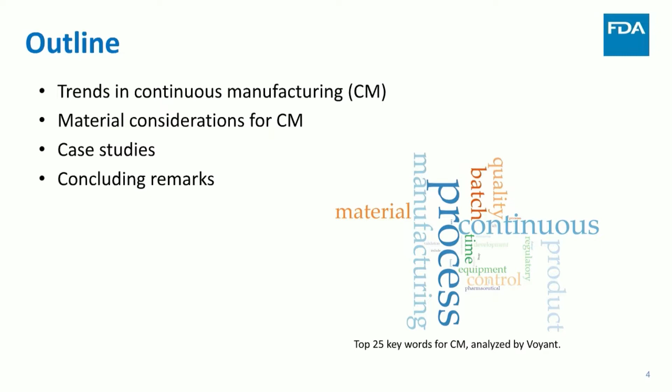Over the past decades, we have seen a lot of efforts from academia and industry to move the pharmaceutical industry towards continuous manufacturing. Right now, we have more than 4 approved drugs that have adopted continuous manufacturing, and there has been a growing interest in implementing continuous manufacturing for pharmaceutical products through requests and interactions with the FDA Emerging Technology team. As of February this year, there have been 32 requests and 60 interactions with the FDA Emerging Technology team, and a proportion of them are related to developing continuous manufacturing platforms.

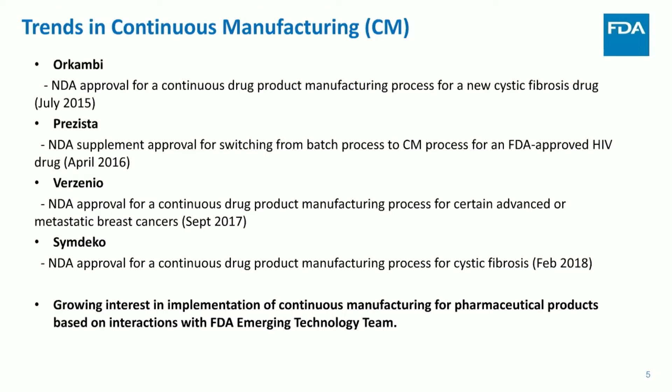Implementing continuous manufacturing includes many aspects, from material properties, process understanding, and control strategy. Since I will be focusing on the material properties today, let's start with this question: what is the role of understanding material properties in general pharmaceutical development efforts?

Whether in batch processing or continuous manufacturing, the bottom line here is that we don't want the quality of the final product to be impacted. Statistically speaking, the variations of the product can come from the variations of the materials, including both APIs and excipients, the variations of the processes, as well as the interactions between the processes and materials. In other words, material understanding and process understanding are usually complementary to each other, and both can help control the quality of the final product.

Through a QbD perspective, in order to explore the design space, how critical material attributes and critical process parameters affect the quality of the final product needs to be evaluated. Material flow properties, in some cases, can be considered critical material attributes. There may also be cases where certain predictive models, such as flowsheet modeling, need to include certain material properties. Also, ICH Q8 suggests that the manufacturability of the drug product should be identified and discussed.

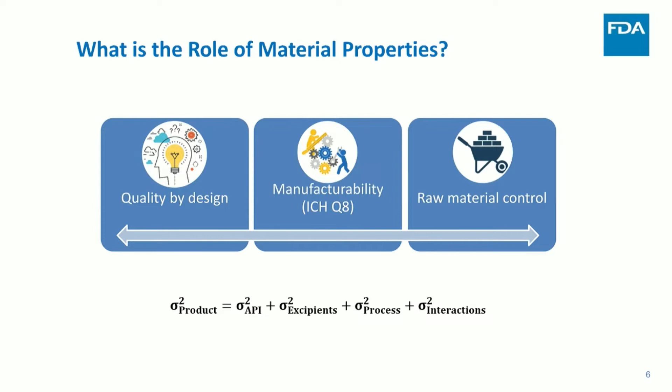Q10 defines the state of control as a condition in which the set of controls consistently provides assurance of continued process performance and product quality. Therefore, appropriate specifications of the drug substance or excipient lot-to-lot variations can provide assurance of the state of control. Also, for some processes, incoming material characterization may require multiple physiochemical evaluations in order to cover the failure modes.

Now, the next question we want to answer is: what are the relevant material attributes for continuous manufacturing? Here I borrowed one of my favorite examples from Dr. Muzzio's group at Rutgers University. In this case study, they were trying to see how selection of tracers can impact the residence time distribution measured for a continuous mixer. We know that the residence time distribution is an important concept in continuous process because it can tell us how much time the materials stay inside the system.

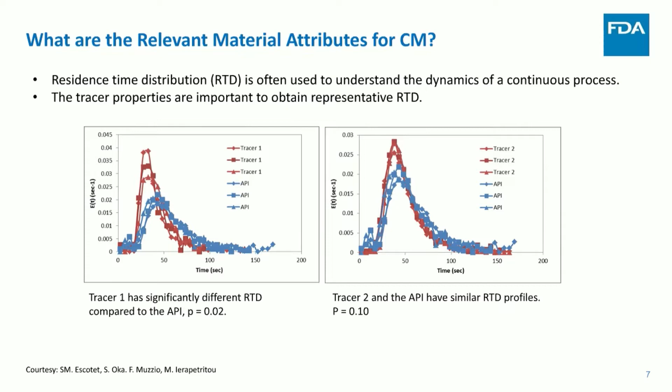To experimentally measure the residence time distribution, especially when the amount of API is not sufficiently available, very often we need to use a tracer to track its concentrations over time. What they found is that depending on the material properties of the tracer, we can get different residence time distributions. If we look at the figure to the left, the properties of the tracer are very different from the API, and therefore the measured residence time distribution is statistically different. As a comparison, if we select a tracer material that has similar properties to the API, like the figure to the right shows, then we're more likely to get an RTD that is similar to the API.

What I'm trying to say here is that while continuous manufacturing offers many advantages over traditional batch process, it also brings some challenges. For example, for robust product and process development, additional material understanding may be needed for certain process modules.

Let's take a look at a simplified scenario in the continuous direct compression line. For hopper design, material properties such as bulk density and cohesion can impact the capacity, the outlet size, and the shape of the hopper in order to induce a nice mass flow.

For feeders, studies have shown that the initial feed factor, the feeding performance, and the refill deviations are dependent on the material flow properties. Also, as discussed earlier, the residence time distribution can be used to track the time the material spent inside the system, and therefore can inform material traceability decisions. Selection of the tracers is important to represent the bulk properties of the in-process materials. At the tablet press, flow properties can also impact the weight uniformity and ultimately content uniformity.

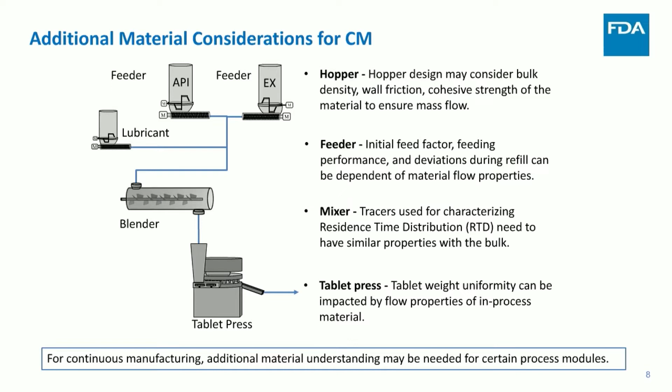That brings us to the next question: what is my material? I myself used to spend time in the lab working on characterization of bulk solids, so to me this question is usually followed by a series of sub-questions. For example, how does the material behave under certain conditions? And what are the variabilities of the material?

Then, in order to characterize it, what characterization test do I need to use? And for that typical test, what test conditions do I need to select? During formulation development, how can we select a material? And in continuous manufacturing, if I want to compare one material to another, what types of materials do I need to look at, and how do I leverage what I know about the materials to facilitate process development? Some of these questions have already been discussed in published papers, and some might be out of the scope of my presentation today.

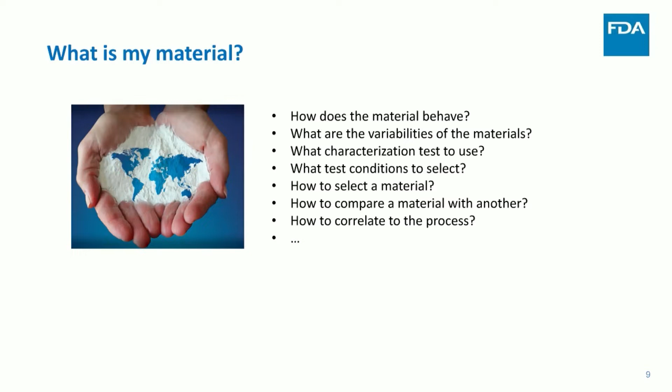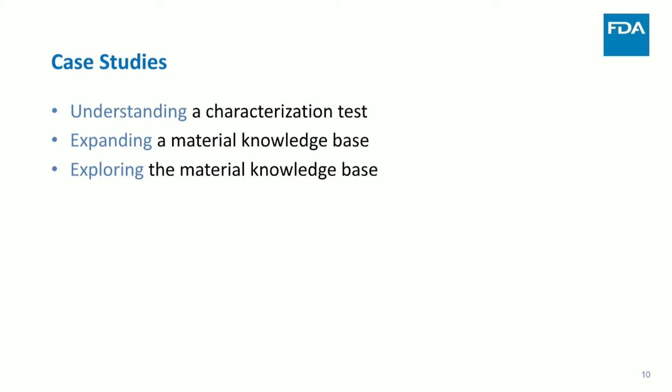With those questions in mind, I would like to highlight some of the case studies going on at FDA, from the Division of Product Quality Research in the Office of Testing and Research under the Super Office of Pharmaceutical Quality. Specifically, I will start with one single test, the shear cell test, then talk about how we expanded our material knowledge base to multiple testing techniques, and finally how we use the material knowledge base with multivariate analysis to explore it.

One of the most commonly used tests to measure flow properties of material is the shear cell test. There are different types of shear cells commercially available, and to perform a shear cell test, we need to define several testing parameters. For example, the initial consolidation stress or normal load at pre-shear, and the number of yield points, in order to extrapolate the Mohr-Coulomb model to get parameters such as cohesion and flow function coefficients. We also need to specify the consolidation stress or normal load for each individual yield point.

Like other testing, rushing to pick a random number and start testing is not helpful for a meaningful measurement. In ancient China, there is a saying that sharpening your axe will not delay your job of wood cutting. I think this is particularly true when we want to define testing parameters for powder flow characterization.

The reason we want to characterize powder material is that we want to know how the materials will behave in the manufacturing process. Therefore, to have a meaningful measurement, we may want to know what the conditions of the manufacturing process are, so that we can try to match the testing conditions with the conditions in the real processes.

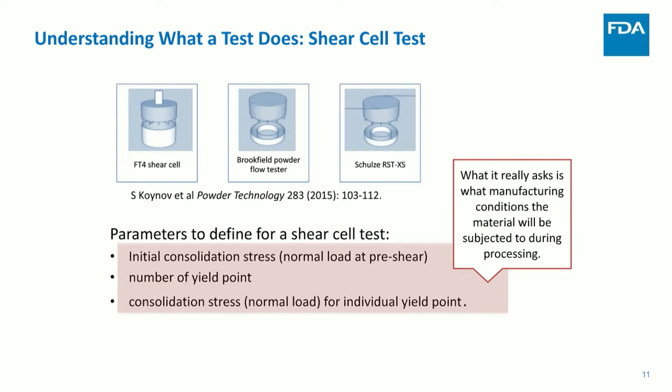Luckily, solid processing has been used extensively in other industries, and we can use lessons learned from other industries to help us better characterize materials under more pharmaceutical process-relevant conditions.

Here is an example in which we evaluated the consolidation stress inside a feeder hopper. The one to the left refers to hoppers with vertical walls, based on equilibrium of forces on a differential element. The one to the right applies to hoppers with angular walls, with the assumption that the radial stress field, the magnitude of the stress in the converging section of a hopper, is assumed to be proportional to the distance of the element from the hopper apex. By calculating the stress conditions inside the hopper, we can then select the appropriate testing conditions for the materials.

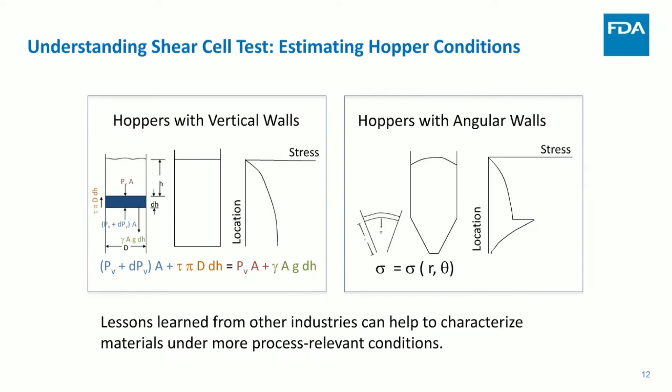Using this method, we evaluated the consolidation stress of a loss-in-weight feeder for 6 different materials. I like to call this plot a rainbow plot, because of the way the consolidation stress at different material fill levels is colored. For example, the first figure here suggests that for calcium phosphate anhydrous, the consolidation stress is a function of material fill level as well as the location of the material. The maximum consolidation stress happens when we have the maximum material fill level and when we are looking at the bottom of the hopper, which makes sense, right?

But what becomes interesting is when we compare these with more materials. We notice that as the feeder keeps delivering material and the hopper level decreases, the change of consolidation stress may be different depending on what materials we have. For example, MCC 102 will only change about 1 kilopascal, but croscarmellose sodium will change about 2 kilopascal. The rate of change is also different, if we look at how steep the rainbow is. I think this information can be potentially helpful to evaluate the design space of the feeder or developing the refill strategy of the feeder.

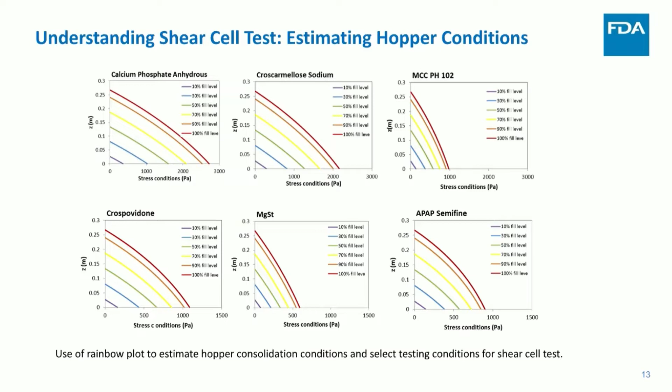We know powder flow is complex and rarely can be described by only one single parameter. Therefore, within our lab capabilities, we started to expand our material knowledge base. In addition to shear cell test, we also started to look at compressibility profile, which suggests the change of material bulk density under different consolidation stresses. We also measure the permeability profile, so that we know how easily air will pass through the powder bed at different consolidation stresses.

We also started to measure the powder flow in terms of the energy it requires to move a blade, in an attempt to capture the powder flow when it is dynamically moving and interacting with a blade. Other tests such as particle size and dynamic vapor sorption are also included in our in-house portfolio to support advanced understanding for continuous manufacturing.

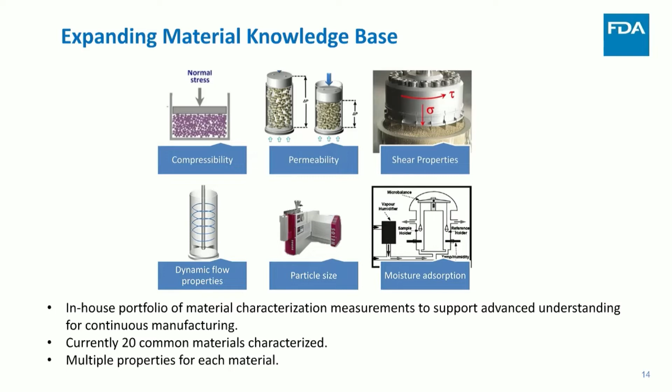Currently, we have 20 materials characterized in our knowledge base, and each material is measured for more than 40 properties. Once their properties are measured, we started to explore the database using several multivariate analyses to explore the correlations between them. There are several ways to do so, and here I'm providing 2 examples showing how to find correlations between different materials.

In terms of machine learning, this is part of unsupervised learning. We can either use a clustering algorithm to classify materials into different clusters, and in this figure, the materials marked with the same colors suggest that they are within the same cluster.

Or we can use principal component analysis to reduce the dimensions of the data set from 40 variables to 3 variables here. For example, in this figure, materials that are close to each other suggest that they have similar flow properties. And in order to quantify the similarity, we can use similarity metrics such as weighted Euclidean distance to calculate that.

And if you still remember the example on selection of tracers to measure the residence time distribution we discussed earlier, this can be a really good case where we can use multivariate analysis to determine the selection of tracers, so that the RTD we measured using the tracer is representative of the RTD of the APIs or the bulk solids.

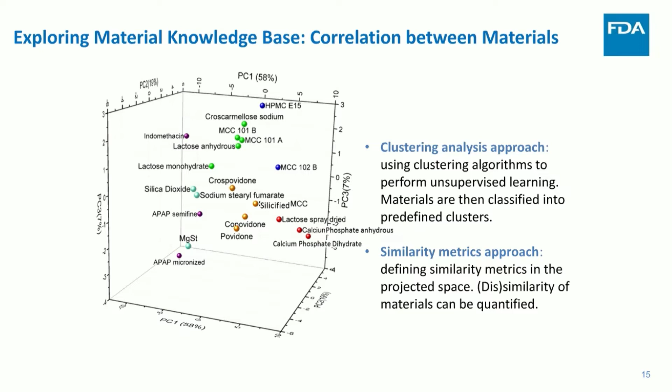With a data-driven approach, we can also see the correlations between properties from different characterization measurements. Right now, this is based on 20 materials and 40 properties for each material. So the data we are looking at on this slide are roughly 800 data points.

I'm certainly aware that this is a data-driven approach, and like other data-driven methods, the correlation we observe doesn't necessarily imply causation. But nonetheless, there is still much information that can be potentially useful. The figure here shows that many of the properties are correlated.

Which makes us start to wonder, if many properties are correlated, are all 40 properties necessary to test the material every single time? And if not, is it possible to find and validate a reduced set of measurements so that we can quickly characterize a material with fewer measurements? I call this reducing the dimension of measurements.

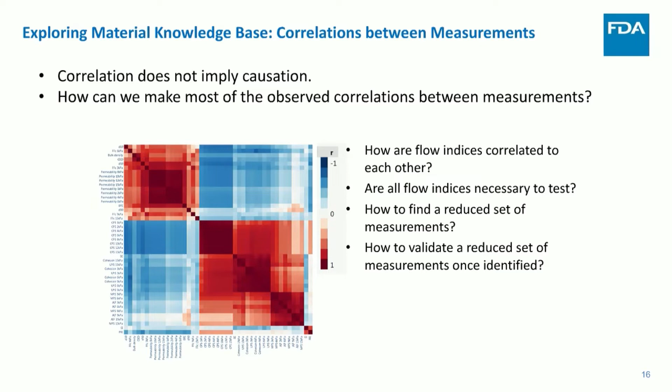In order to try to answer this question, we perform a simulation experiment. This is really inspired by the backward stepwise fitting during regression. When we try to fit a model with multiple coefficients, we can start with including all the coefficients, and then step by step try to eliminate one coefficient to see if it passes certain statistical criteria.

And if we did the same to reduce the dimension of material measurements, in general we did it in two phases. In the initial screening phase, we would like to find, among 126 scenarios, which set of reduced measurements can capture most information. This stage was done using 15 materials.

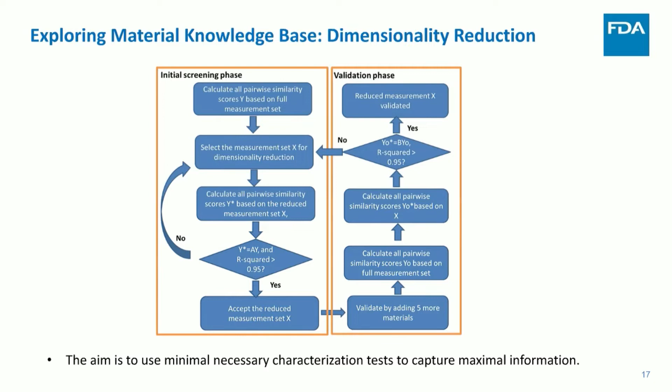And then during the validation stage, we tried to validate the reduced set of measurements by adding 5 more materials into the data set. In this way, we compared correlations between 126 scenarios, and we found that there are 12 sets of measurements that can be considered as a reduced set of measurements.

For example, we can remove the dynamic flow test, the shear cell test at 3 kilopascal and 9 kilopascal, where we still capture more than 95% of the information from the original data set.

I just want to mention that the idea of this dimensionality reduction experiment is really not to prioritize one test over another. I'm not saying that the test that can be removed here is not important. The idea here is to prove the fact that many flow properties we measure are correlated with each other. And because of that, although we didn't do test A, the information may still be captured by test B or test C.

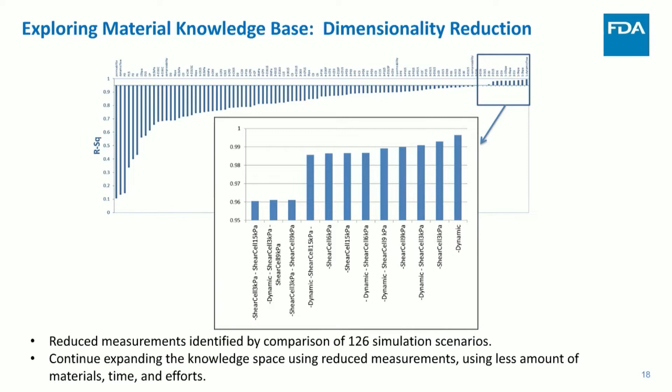As we went through these case studies, you may notice that I used several material characterization tests. However, this doesn't necessarily imply that implementing continuous manufacturing requires tighter or additional material control specifications. However, implementing CM potentially requires additional understanding of the material manufacturability and variabilities for process development.

In the end, we need to consider whether the process is robust enough to deal with the variabilities from the material properties, so that the quality of the final product is controlled.

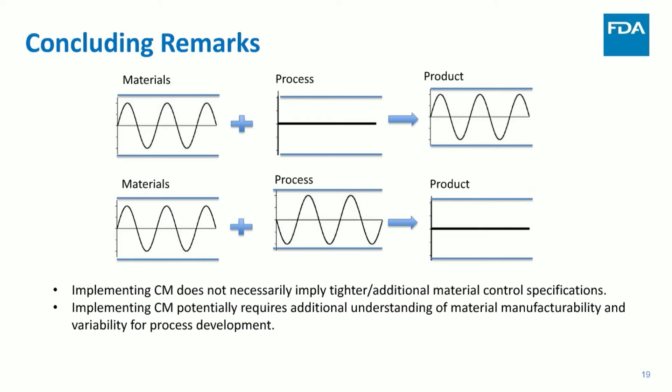During the product quality risk assessment, material understanding is important for continuous manufacturing. We have discussed the role of material properties and show that characterizing flow properties of incoming materials can be helpful to evaluate the manufacturability of the drug products. Certain material properties may need to be evaluated for certain unit operations in order to implement the CM technology.

Last but not least, control strategy is commonly discussed in CM. In fact, raw material property evaluation and control is also a key element of the control strategy for continuous manufacturing processes.

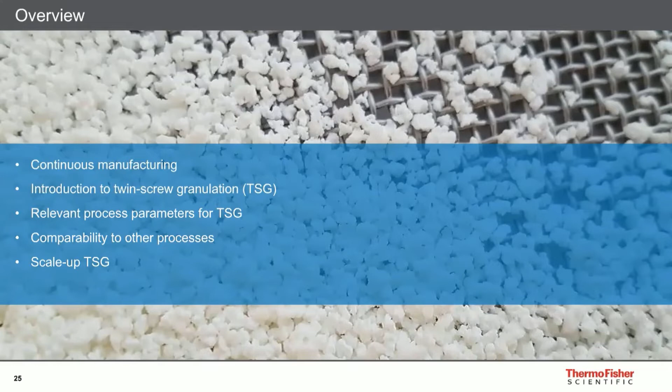There have been several publications on the advantages, disadvantages, and challenges of continuous manufacturing. Looking at the twin screw granulation side of the business, this continuous technology helps us tremendously in saving time and material during the development and research of a new formulation. Having instrumentation that is quite small in size and throughput, and being continuous of nature, allows us to screen a lot of process variables, and this can help us save up to 80% of the precious time and the very costly materials involved in the very early R&D stage of a new drug development.

Going to the production side of continuous manufacturing can help you increase your flexibility that we sometimes don't have in batch processes. There is less storage needed because normally we have one train of material going through the dosing until the final drug process, so we don't need any storage area or to ship intermediates around.

Typically we have a very small volume at a time which has been processed. So if something goes wrong in a process, we have less waste and don't have to discard a complete batch of material. And being very flexible in setting up the production, we can also react to unforeseen market demands like an epidemic in one end of the world, which we didn't forecast two years ago.

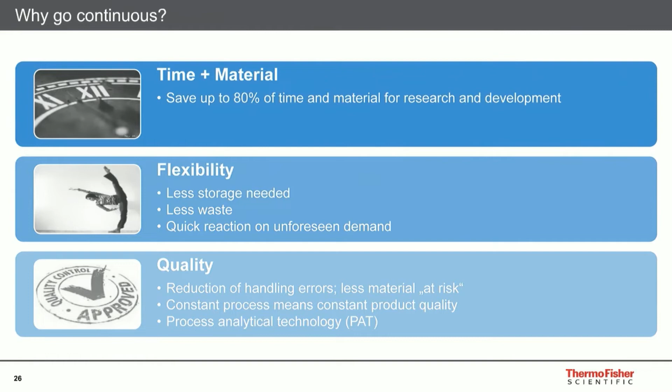And the quality aspects that we heard quite a lot of, I just wanted to highlight one point here. Because we can equip the process with quite some analytical tools online, as soon as we can ensure a constant process, that means that we also have a constant product quality throughout until the end.

As I said, today I will look at the twin screw processes, the twin screw granulation. So the invention of the screw goes back quite in time to dear old Archimedes. And this single screw, as we see here in the animation, has been used for different industries throughout. But if you look at the granulation, that's the point of interest where we have the discussion today.

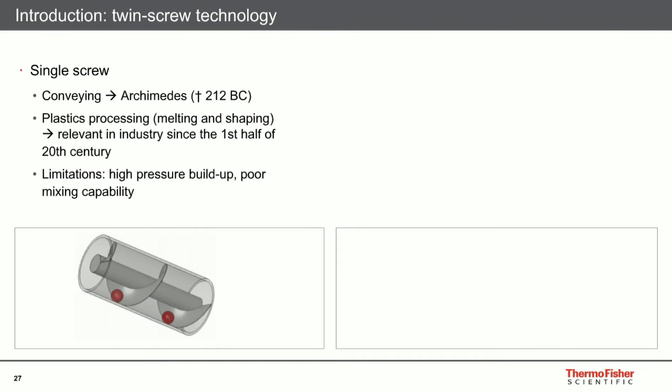Single screws have a limitation in processing because they build up a very, very high pressure. The screw rotates inside the processing chamber, the so-called barrel. And it has a very poor mixing capability, and this is something that we desperately need for the granulation process.

So it was until the 1940s where the twin screw extruder was developed, actually as a tool for polymeric chemistry. And the twin screw extruder, in contrast to its single screw sibling, exhibits a very nice mixing capability and introduces a lot of shear energy that helps us achieve the agglomeration that we need for the twin screw granulation process.

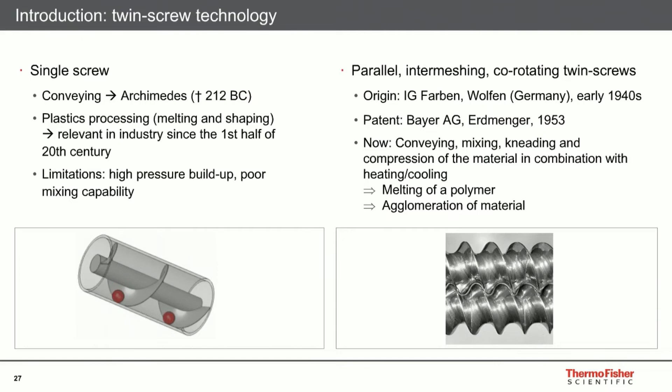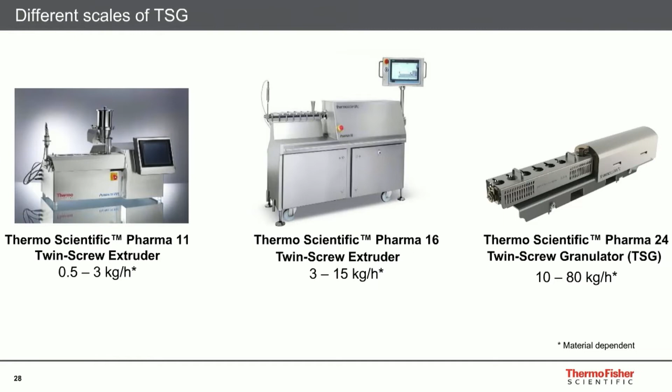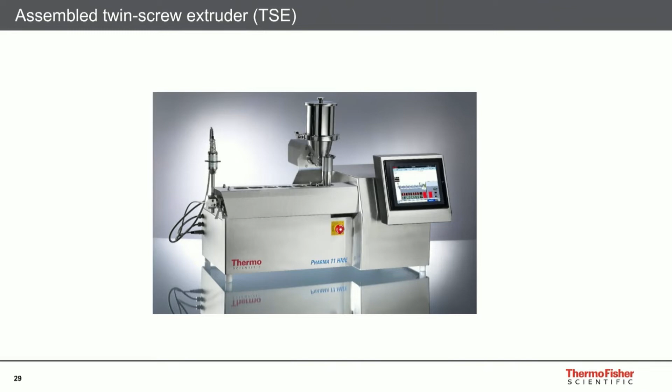So this is the Pharma 11 extruder in a bit more detail, because the following case studies and data I would like to present were achieved using that model in our laboratory. As you can see here, the benchtop extruder is for pharmaceutical use, so it has very easy disassembling and assembling, and all product contact parts here just in front of the machine can be disconnected from the drive and measurement unit and can be cleaned, so there are no worries about cross-contamination throughout the whole experiments.

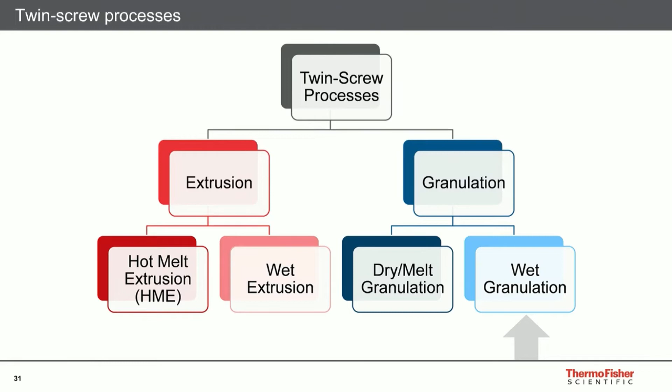So when we look at twin screw processes for pharmaceutical usage, they normally fall into two different categories. One is the extrusion side, which is the left branch of my tree here, so to speak. The hot melt extrusion process is well known for pharmaceutical usage since the 1980s. And the right branch is the granulation, which splits up into wet granulation, but also very interestingly, the extruder can be used for dry or melt granulation here. Today, I would like to focus on the wet granulation possibilities in pharmaceutical twin screw processes.

So here we have a schematic of an extruder, one for extrusion, one for the granulation application. I would focus on the right, on the bluish colored twin screw extruder. Normally we see the material feed from the right processing to the left. We have one or two solid streams, hopefully well characterized, as Dr. Wang just explained, going into the extruder. Then we have a liquid feed stream as the agglomeration liquid, and inside the extruder the two screws rotate in the same direction, making the shear energy, the mixing and the kneading, and actually achieving the agglomeration.

The end of the extruder when used for granulation is an open discharge. So maybe in contrast to the left picture where you have a die at the end and where you see this gray box indicating a pressure build-up, we are going to release the product here to open air. So this is a pressureless system, and therefore normally with the same extruder you use for extrusion, you have higher throughputs in granulation.

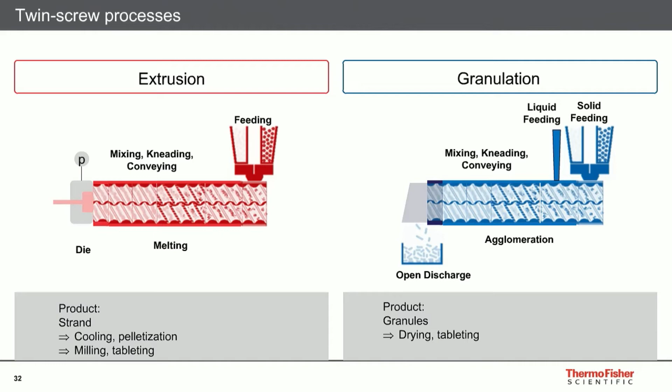These elements can be set up in different lengths, so you have all these individual elements stuck together, giving you different lengths from one element to almost mixing elements throughout your screw design.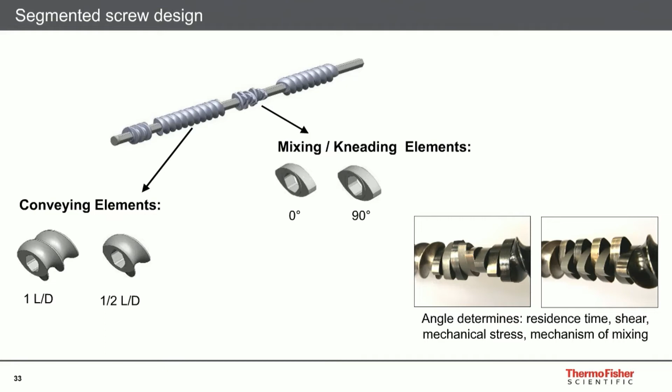Another thing is that, as you see in the right-hand picture, the tip of the individual mixing elements have an offset, and this offset can vary in angle between 0, 30, 60, and 90 degrees, as can be seen in the picture. We'll have a closer look at that later, because this offset angle gives you flexibility in introducing shear into your process.

As I said in the beginning, we did quite extensive trials screening for the process parameters in granulation with a Pharma 11 extruder. Throughout the data I'm going to present now, we used a placebo formulation. We started with a pre-blend of 5% PVP, about 30% cornstarch, and a bit of lactose, and added a bit of talcum. Water was used as the wetting agent in the wet granulation throughout.

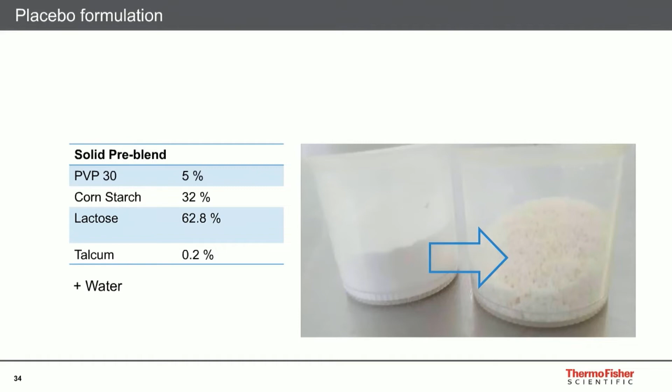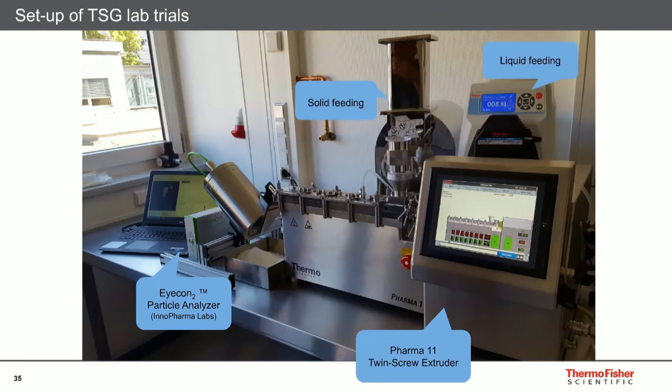Here's a photo of the setup in the laboratory we used. In the front you see the Pharma 11 extruder. On top, to the right, we have the liquid feeding system, which was a peristaltic pump, so there was no gravimetric control of the liquid feeding. But the solid feeding of the pre-blend materials happened by means of a gravimetric twin screw feeder inside the barrel of the extruder. At the end of the extruder we had an Eyecon 2 particle analyzer from our colleagues at InnoPharma Labs in Ireland to do an online measurement of the granule size, shape, and some quality control online.

With that testing equipment, we looked into the influence of process parameters on the actual granule quality. A lot of parameters, like the throughput of the system, the liquid to solid ratio, the screw speed, and the barrel temperature, for example, are variables one can alter in a set of experiments without stopping the machine. That's one of the advantages in continuous manufacturing.

So you run your equipment, for example you change the screw speed, give some time for the system to reach equilibrium again, then you can analyze your particles. With that, you don't have to stop your experimental setup and can screen quite a variety of different parameters in one run. Screw configuration is also a very important parameter here.

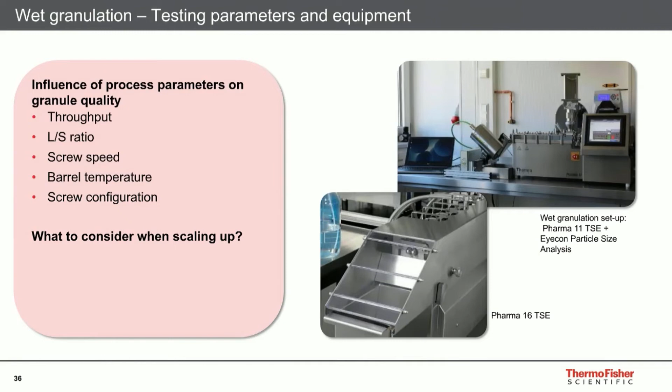That's different though - for sure you have to stop your extruder, disassemble the screws, set up a different screw configuration, and start all over again. Finally, last but not least, as I said in the beginning, we looked into the considerations of scaling up to maybe a Pharma 16 or a bigger machine.

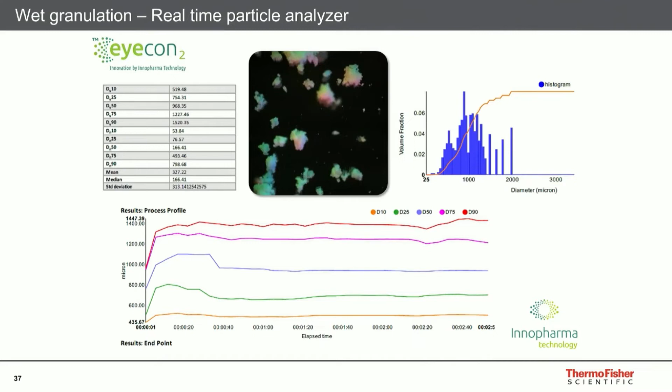The Eyecon particle analyzer, provided by InnoPharma, is a visual instrument positioned at the end of the process. It takes pictures online and gives you a nice distribution of particle sizes with different mean diameters. What we could see using a cumulative graph or histogram was that all the measurements we did with the Eyecon 2 correlated really nicely with sieve analyzers. So the numbers might look a bit different, but the trends are very similar to the sieve analyzers you find in granulation quite often.

The first parameter we looked into was the liquid to solid ratio. That's one of the parameters also very important to play with in batch granulation. The graph to the left shows particle sizes from 0 to 4,000 micrometers. What we see here is a cumulative curve of the particle distribution, so the volume percentage with a representative mean diameter.

The different color codes on the graph go from 18 to 28% of liquid into the system. Starting with 18% liquid, the particle size distribution is to the very left. By increasing the liquid, we increase the mean diameter of our granules, so the whole graph shifts towards the right with increasing liquid. But we could also see that the slope of the graph always stays the same, meaning we keep the same particle size distribution, just shifting the mean particle size diameter.

With increasing liquid, we see an increase in oversized particles, due to better agglomeration. We see a decrease in the fines because we have a more thorough granulation overall. What can also be seen, though we didn't measure it ourselves but it's noted in literature, is an increase in density of our granules.

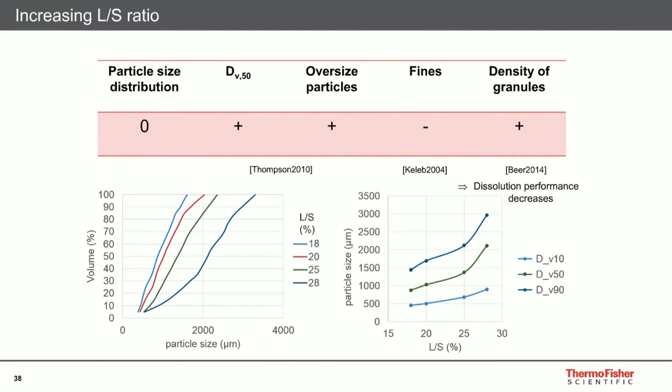The right graph shows the different D50, D90, and D10 values, and that really aligns with what I just said - that we stay with the same particle size distribution around an increasing mean particle size.

So what happens if we use the extruder to vary one parameter, the screw speed? If you remember the screw setup I showed in the beginning, we have conveying elements pushing the powder and wetted powder through the system, and the mixing elements. The number of mixing elements, as we'll see, is far lower than the number of conveying elements.

If I increase my screw speed, I increase the shear energy, and normally chop off my agglomerates, getting finer agglomerates. This is what we see in the graph here. From 300 to 900 RPM we kept the throughput constant, about 1 kilogram per hour, and by increasing the screw speed we could decrease the average particle size. But in a certain range, 500 to 800 RPM, there's not that much happening, while lowering our screw speed gives us really big agglomerates. This also aligns nicely with what we found in the literature.

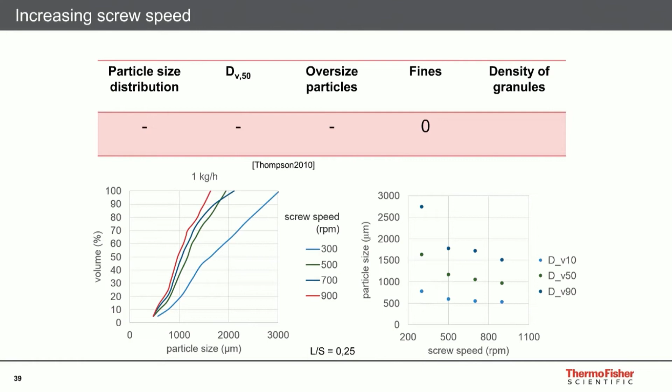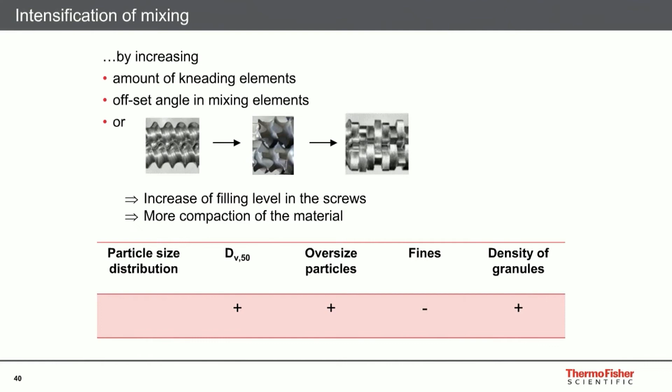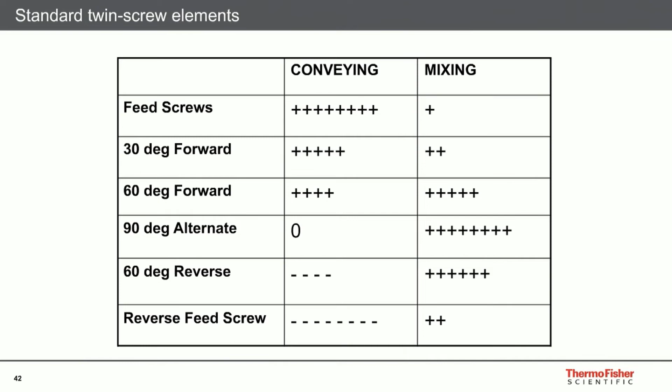If I have mixing elements, their tips have an offset of 30 degrees. The conveying capabilities drop down, but the mixing and shear energy is intensified. At 60 degrees, 90 degrees, it's the same - the conveying capabilities of these mixing elements drop down until zero, and the mixing energy, the shear energy we put into the system, is highest here. So at the 90 degree alternating mixing elements, if you stop your extruder or run the feeder with the extruder empty, you will always find some powder remaining in the system.

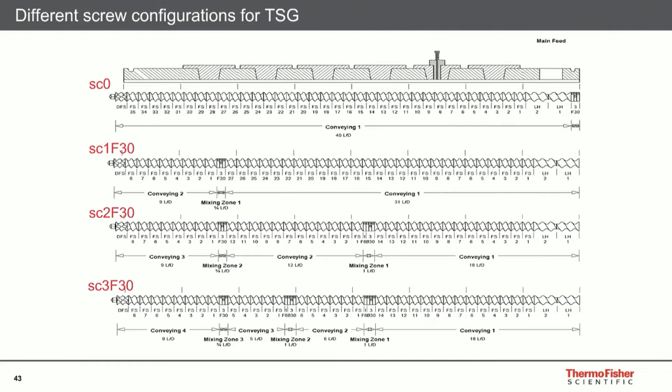The following 3 screw setups have mixing sections with mixing elements at a 30 degree offset angle towards the end of the screw. That's the first from the top, then the second, then the third, always moving more towards the powder inlet. By distributing your mixing zones throughout the whole screw, you can avoid small mixing zones, and you can avoid overheating in one spot.

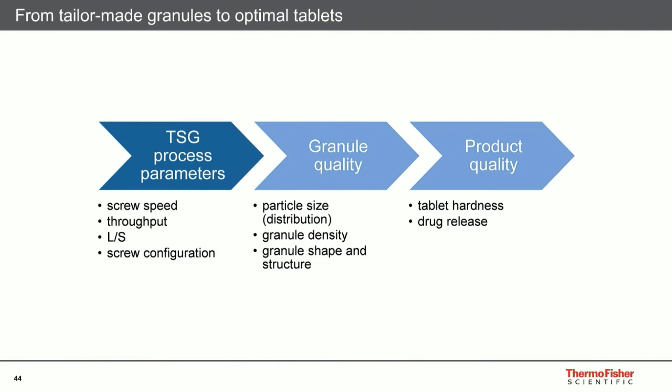With the different process parameters of the twin screw granulation—screw speed, throughput, liquid to solid ratio—and the configuration, you can really tailor your particle size distribution, granule density, and also the shape and structure of your granules. Ultimately, with these properties in hand and knowledge of the raw material, you can design your product quality, which leads to the desired drug release profile or tablet hardness with your end product.

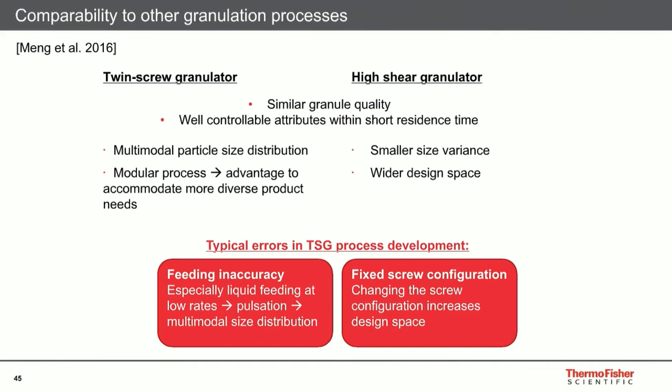As soon as you start using your screw configuration with all the different elements and positions, as I just showed in the slides before, you have a huge design space using one extruder. So I can only encourage everybody doing twin screw granulation to change the screw setup from time to time.

Now in the last part of my presentation, I'd like to give some thoughts about scale up. Sometimes if you start in a small scale extruder, for whatever reason—might be the availability of the amount of materials at the beginning—you have to move to a bigger extruder towards production.

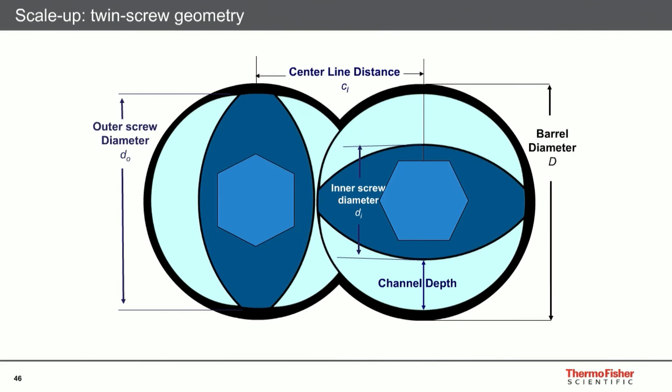Everything is based around geometrical similarity of the screws. What we see here is a cross-section of the twin screws, and all these different parameters—like the outer screw diameter, the channel depth, the center line—are something we need to keep constant from a small scale to a big scale extruder in order to make a successful scale up. For example, the whole length ratio to the diameter should be constant in each size. The inner to outer diameter should be constant in each size, and as well the center line to outer diameter ratio should also be constant. If we keep that constant, we have geometrical similarity, and all the physical interactions I'm now going to explain hold true across all the scales.

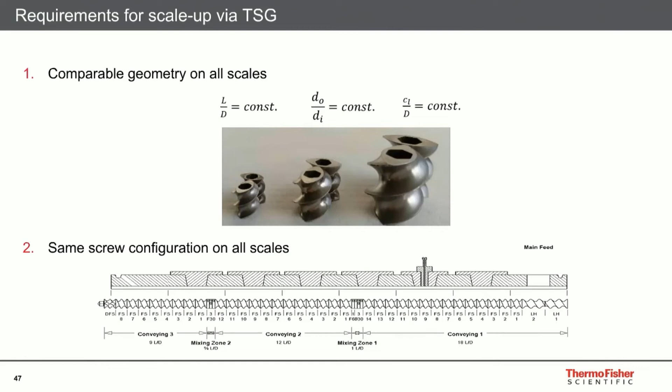For sure, if we go from a small to a big scale extruder, we should also keep the screw configuration the same. There have been quite a number of publications on scale up—Schuler in the 90s did one.

So the throughput of our production extruder is the throughput of the laboratory extruder to the power of 3, with a ratio of the diameters here. That's an assumption, a good starting point. So if you go to a bigger size extruder, that's the throughput increase you could expect.

The other parameter we should look at is the specific energy, because we put energy into the system, shear energy, to do the mixing. The specific energy is the shear energy, mechanical energy we put into the system per mass of powder, so that should be kept constant.

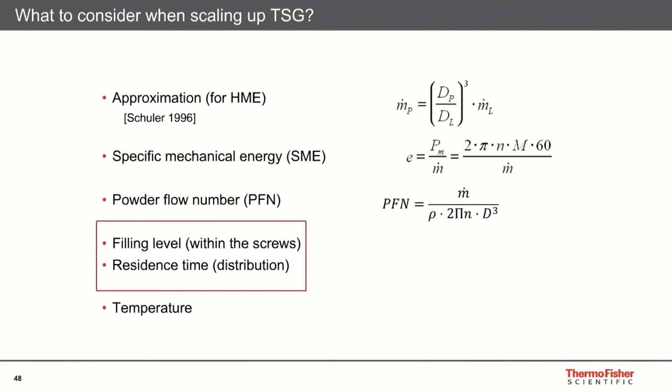If we have too little material in the system, it can behave very strangely, and you never come to a stable process. This is what my colleague showed here.

So with 15 kg an hour, increasing the screw speed between 0 to 1000 RPM, you see the line dropping, and that's what we expected. The mean residence time is faster the faster you go with the screw speed.

That holds true for 10 kg and 5 kg, but if you go to 3 kg for this size of extruder, a very low filling level, all of a sudden increasing the screw speed gives you a dramatic increase in the residence time as well. So the filling level of the machine is not high enough anymore. There isn't enough powder to push the other powder through the system, so we get back-mixing effects, and all of a sudden a very unstable system.

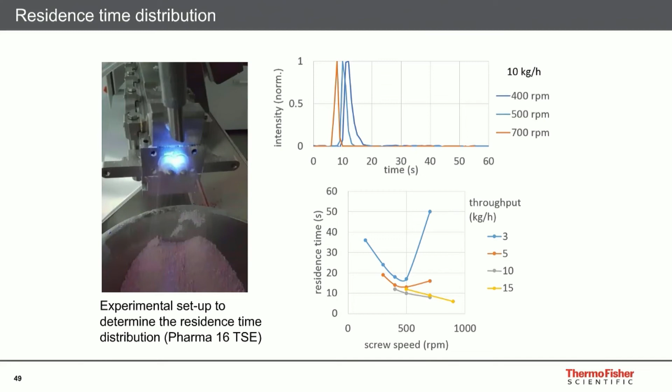So the point I wanted to make here: there are different sizes of extruders for a very good reason, because if you underfill very big extruders, you might have a hard time reaching a stable process.

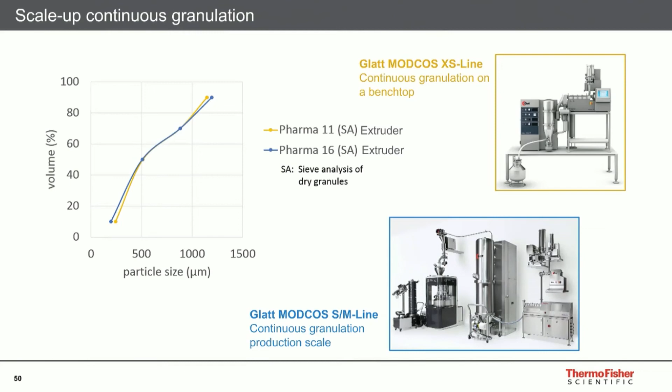But also here with the sieve analysis, the particle size distribution really matches between the experiments we did on the 11mm and the 16mm extruder, using just the same scale-up parameters as I was explaining.

With this, I would like to come to the conclusion of my talk. As we saw with Dr. Wang, it's very important to know about the properties of the material you're working with, but also the process parameters help you design the product you need in the end.

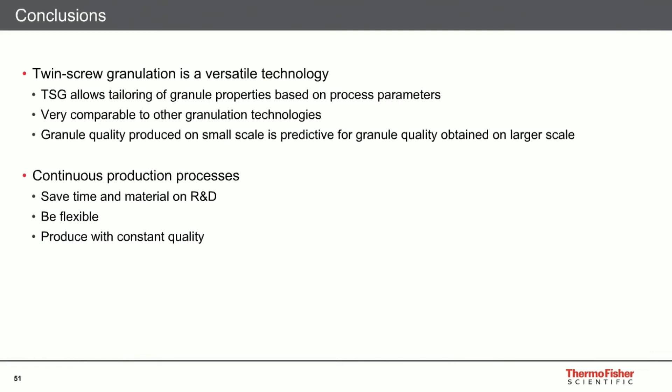I hope I could show you that twin screw granulation is a very versatile technology for your different formulation requirements, and that if you start into continuous manufacturing using a twin screw extruder, you can expect very comparable results to other technologies you might be used to. The granule quality on a small scale extruder is very predictive of what you can expect in larger systems.